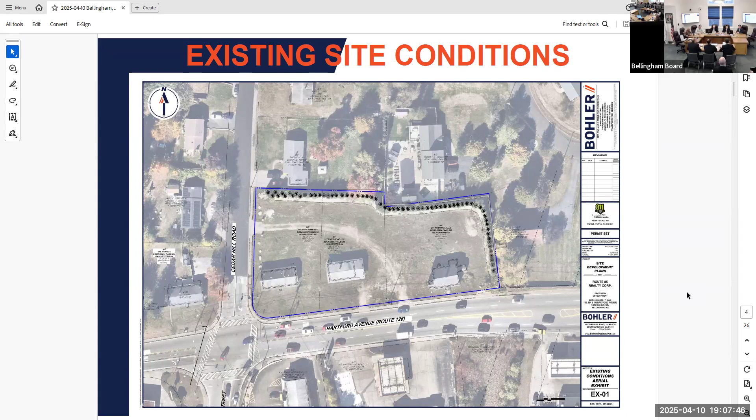From the proposed conditions - next slide, please. I'll keep this super high level, so if you want me to go into further detail, please let me know. We're proposing about a 5,000 square foot building, actually on two stories. You'll notice it's located on the western one third of the site.

Access into the property would be through Hartford Avenue, that would be a full access in and out. There's also just a secondary driveway located on the roadway to the left that would allow the cars to get back to the signal at that location.

There are 40 parking spaces that are required for the development, just retail office use. There are 49 proposed on the site plan, of which there's 3 accessible parking stalls as well as 2 electric stalls. You'll notice the screening that I talked about earlier.

You can see the existing berm directly behind the building - that is remaining. On the right-hand side, there's an existing berm there that's remaining as well. And then right in the middle, top right, there was actually a wall that was constructed. That wall stays. There's a fence on top of the wall as a buffer above. We're just replanting the landscaping right in front of that, so that will be replaced, but the wall and the fence and that screening does remain.

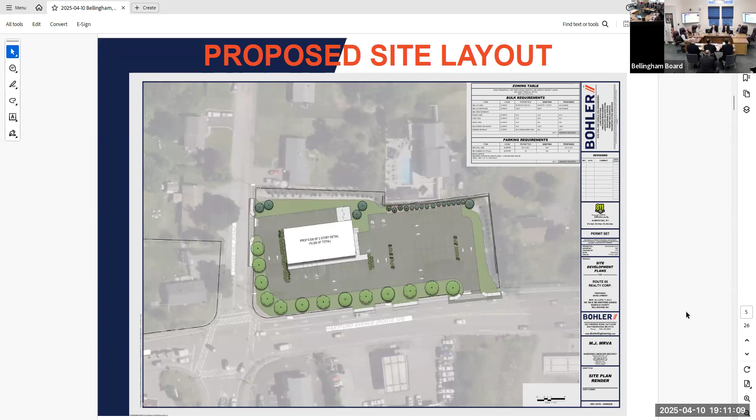reiterate that the existing wall and landscaping that John mentioned was put in by the applicant at the request of the abutting property owner after the applicant acquired the property. Thank you.

Good evening, for the record, Jason Adams with Bowman Consulting. We are in the process of completing a traffic impact study that would follow Mass DOT traffic impact study guidelines. We have collected existing traffic volume data, collected at the end of March at the intersection of Hartford Avenue and Cedar Hill Road, and we'll be using that as the basis for our traffic analysis of the intersection as well as the site driveways serving the project site.

We'll be working in concert with John and his team to ensure that the project site can have safe and efficient access. As part of our study, we are conducting a review of available Mass DOT crash data to understand if there's any crash history in the area. We are aware that Mass DOT is completing an improvement project in the area, so we're factoring all of that in to paint the full picture of existing conditions as well as future conditions with the project in place.

We have completed a sight distance review of the driveway locations. Those, as they're laid out by Bohler, have met industry standards for stopping sight distance and intersection sight distance.

We'll be completing a traffic analysis of operations of the signalized intersection as well as the driveways with and without the project to help understand the project impacts. At that point, we'll work with the project team, present the information back to the town, and work to mitigate any impacts of the project, and are certainly willing to have discussions to understand what best we can do to make sure the project fits in well within the community.

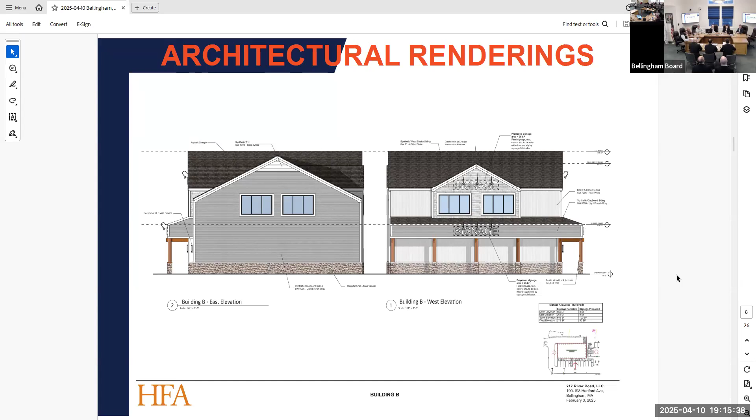Anyone else on your team? That's it for now. I have one question for Rob. Since we're probably going to have common questions on both these applications, and we hear from the applicant on 182 to 186, then open it to the public, so we're not hearing the same questions - is that permitted? Yeah, I mean you can do that. We've done that before for projects that had multiple hearings, like the scenic road. Okay, if that makes sense, it would probably be easier for the public as well, because when we open for public comment we can refer to the commercial building or other building that's about to be presented. I think that makes sense. Does that work? Absolutely, that makes a lot of sense. All right, so you want to give us some information on 182 to 186? Certainly, there's another presentation for that one, right? Yes. All right, let me open it up. I just thought I'd make the evening flow a little bit better. No, that makes a lot of sense.

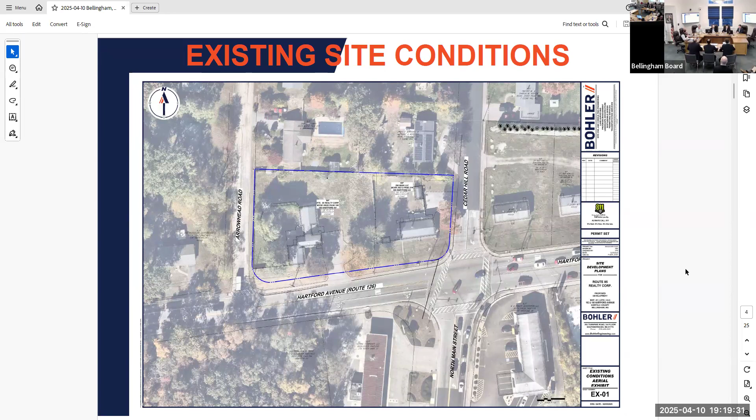So what we're proposing is a bank with a drive-through, about 3,500 square feet. Again, it's on the western third of the property where the structure is, and then the parking is on the opposite side. As currently drawn, the drive-through is located on the western portion of the property. From an access standpoint, there's a full access driveway on Hartford Avenue, enter and exit, and there is a driveway on Cedar Hill Road, so you can get back out and essentially get to the signal.

From a parking standpoint, there are 14 parking spaces required under zoning; 19 are proposed, 2 of which are handicap accessible and 2 are electric charging spaces. You'll see the trash enclosure on the northwest corner of the property, fully fenced in and fully landscaped around it.

Grading is such that, as I mentioned, there's a good slope along the property, set so the building is a few feet above Hartford Ave, and then multiple feet below the properties up above. So there's actually a pretty decent range between the properties to the north, based on that slope. There is essentially a wall along that entire side that we're proposing. It's kind of hard to see on the plan, but we have a proposed wall on the subject side of the site, and then landscaping, including a landscape berm, on the high side of the wall for further screening. So we're lower, there's a wall, and then landscaping, just to further help with the transitioning in this zone.

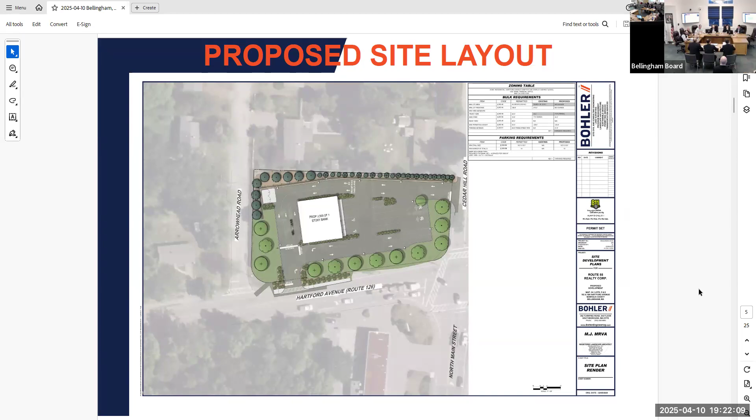With that, I can turn it over to Jason to talk about anything from a traffic standpoint on this application.

Again, Jason Adams with Bowman, essentially the same story as the previous site. We are completing separate studies for each site. Those studies will account for each other, so the bank site here will account for the retail site and vice versa, but there will be 2 separate analyses done so that each project can be evaluated on its own merits in terms of safety and operations. Again, we've collected traffic volume data at the Cedar Hill Road signal with Hartford Avenue.

Looking at the crash data from Mass DOT, we have again performed a site visit to look at the available sight distance at these driveways as John and his team have laid them out. Again, there are clear sight lines in both directions from those driveways, so they meet the industry standards there. And as we advance the study, we will again be projecting the potential project impacts and helping the board and the community understand any potential mitigation that would be required of the project.

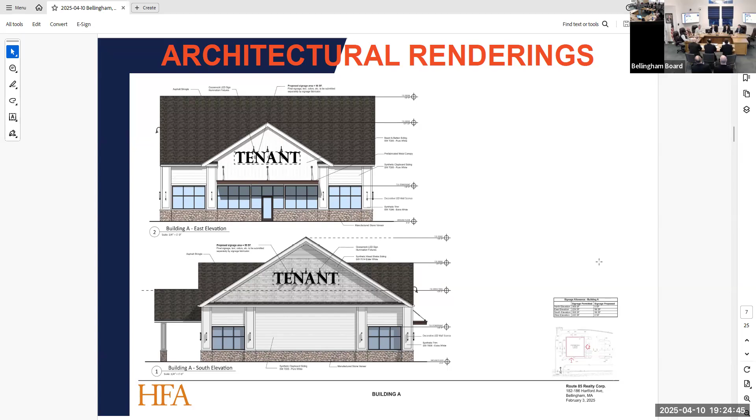So overall, a very similar story, and the material palette here is intended to establish continuity between the two sites.